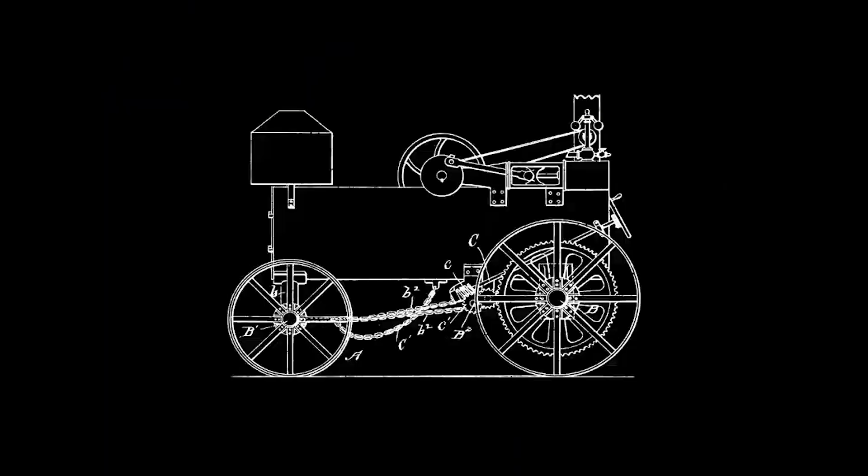You are everywhere, yet sometimes out of reach. You move us forward and bring us together. And together, we're on a journey towards the future of energy.

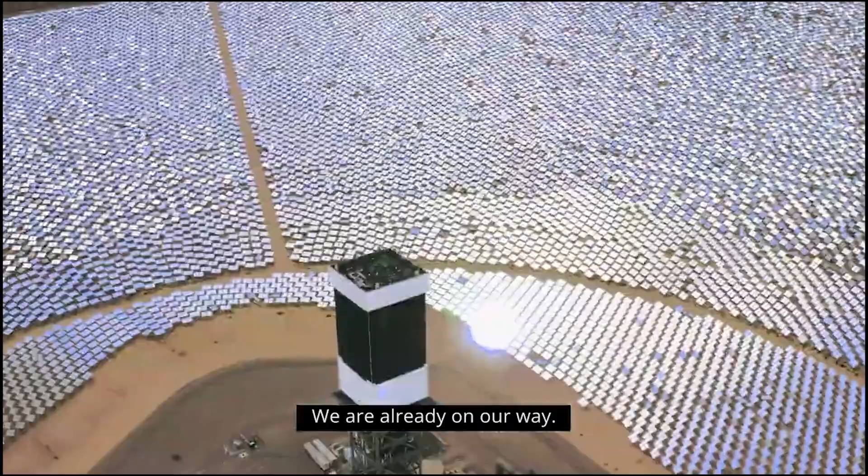So what will it look like? It's hard to say, but we know it will be sustainable and abundant. We're already on our way, with a common purpose, each of us playing our part.

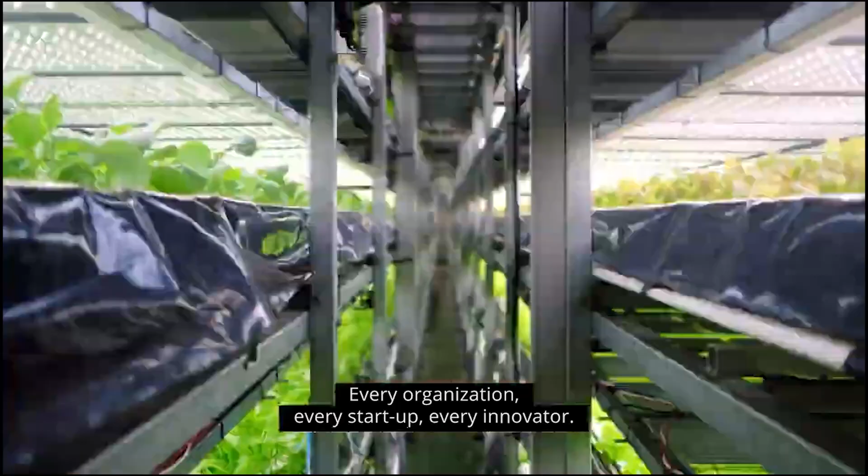At Deloitte, we're connecting every bright mind, every organization, every startup, every innovator, every citizen, CEO, and regulator. Making this future happen won't be easy, so we're developing practical solutions.

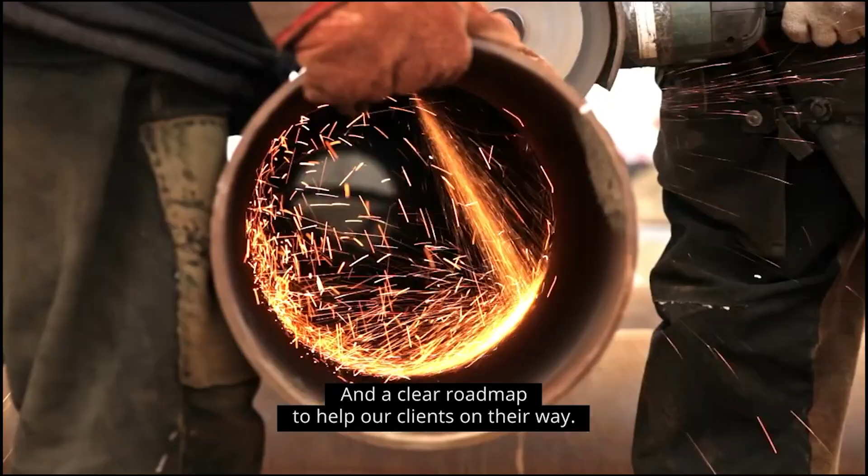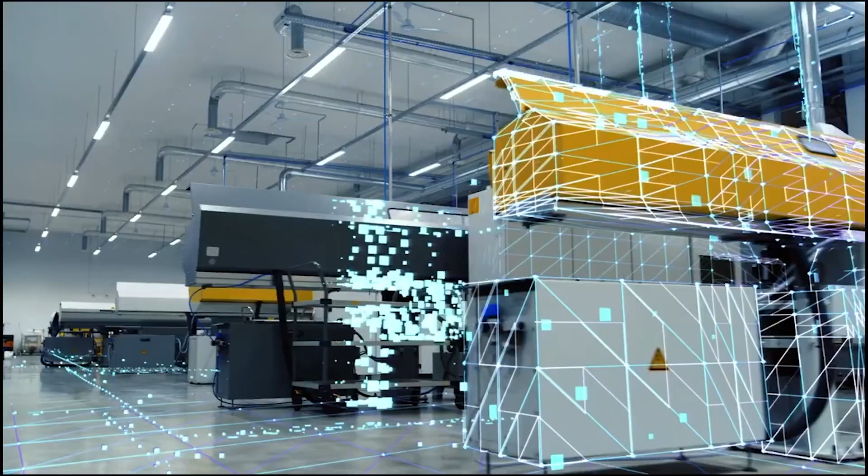And a clear roadmap to help our clients on their way. We'll keep making those connections, each step well planned, moving forward together, to make our new energy future a reality. Let's connect for a new energy future.

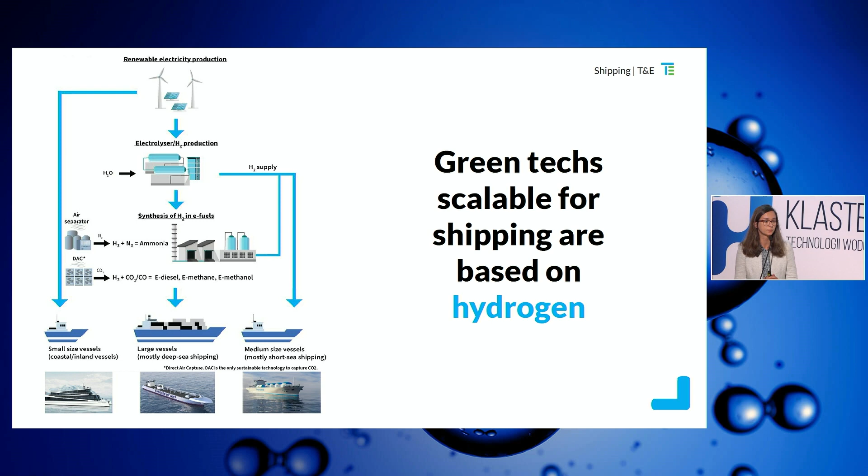So why is it an opportunity for ports to deliver green hydrogen for shipping? Well, a few months ago, we were having some difficulties with policymakers in Brussels, and especially the European Parliament, to try to convince them that there is this green hydrogen economy, but ships could also benefit from it, and it's actually a sector that is very hard to decarbonize.

But they were telling us it's extremely expensive, it would be very expensive for the end consumer. Well, we did the calculation, and actually, if you put a pair of sneakers in a box, in a container ship, it would cost just 8 cents more to power the ship with 100% of green hydrogen.

Here it is e-methanol. So this is because of the magics of shipping economics, which are quite unknown to most of us. But the facts are here.

And the point is how to upscale this green hydrogen for shipping, because currently there is no green hydrogen flowing to ports or powering ships. And the answer, we believe, is in legislation.

So, of course, we have some projects in ports. Many large ports in Europe have developed green hydrogen hub strategies, but we don't see a lot in these strategies of

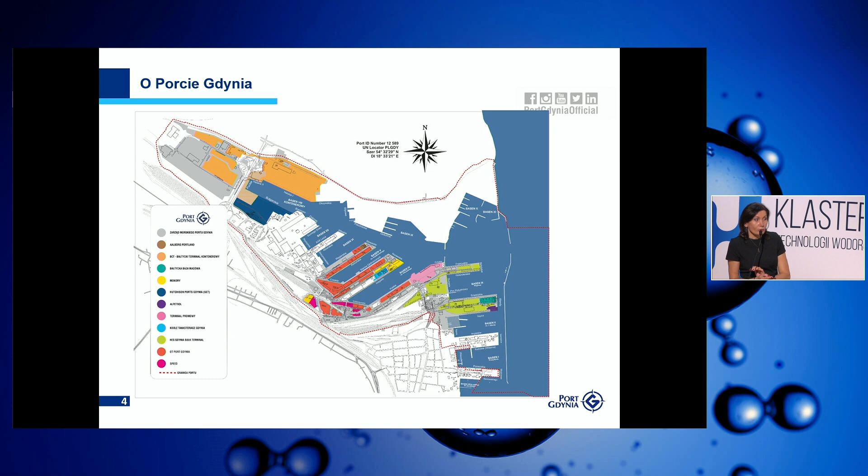We've got shipyards, we've got entities that provide port-related services, also those pertaining to maritime economy. These smaller entities also support the bigger ones so that they can really meet the demand for handling different kinds of cargoes.

Given that the port is a big entity bringing together many smaller ones, a few years ago we started working on fuel and power transformation. What I listed here are the most important initiatives concerning infrastructure and superstructure, two major directions: alternative fuels and renewable energy.

Port of Gdynia authorities is a topic that animates a range of activities catering for different needs of our customers. We bring together clients from port areas with those that are bidders in all sorts of procedures concerning our fuel and power transformation - think of producers of equipment or machines that can offer their products to recipients operating within our port terminals.

I will turn to the screen as I cannot see the small print anymore. Anyhow, we have both filling up stations and pipelines that are to be built in the port for the entire transformation to be attainable in terms of superstructure. We've got tanks, containers, a bunker, and vehicles enabling filling up.

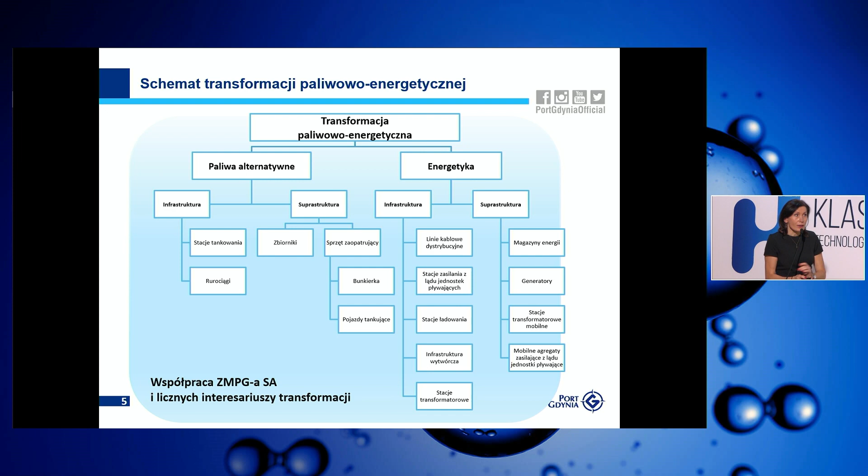The fuel and energy transformation has a few components to it. One of those is the implementation of hydrogen-related economy. A discussion has been going on how to ensure the fuels for those vehicles operating within the port and those ships calling at the port, and we are considering hydrogen.

Before that, we focused on LNG and we introduced all the procedures related to it in the Port of Gdynia. Now we believe that we shouldn't focus on a single kind of fuel in the port. In any global port, you have to think about offering different kinds of fuels, hydrogen among them, and also hydrogen derivatives.

Owing to our consultants having carried out all sorts of analysis, we can say that we are launching the initiative of creating a hydrogen hub in the port. So what do we imagine this hub to be like? How is hydrogen to be handled in port terminals? This is just an example.

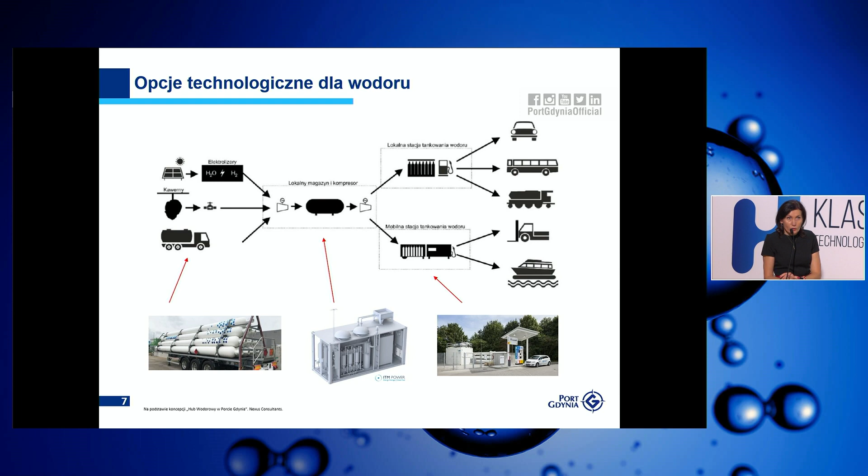There are no similar solutions in any other Polish port, so we need to develop it all. Our idea is to cooperate. In the area of alternative fuels, we do not have competitors here. The more we cooperate, collaborate, and resolve issues that we face, the more joint projects we have, the cheaper hydrogen is going to be. This is our idea for the development of hydrogen economy, and that is why we decided to go for the development of the hydrogen hub in the port of Gdynia.

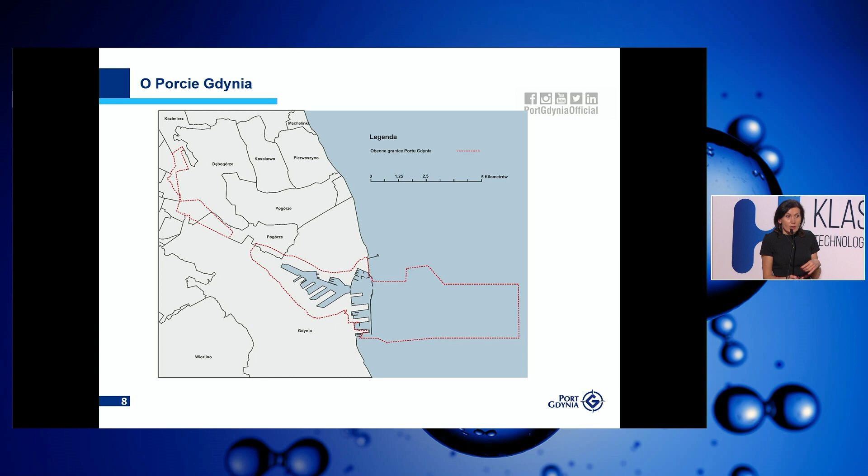There are two areas in the port of Gdynia where you can also see the administrative borders of the port. They're adjacent to each other. They are closest to the embankments in the port, and a more distant one, the logistics zone, that lies within three municipalities: Kosakowo, Rumia, and Gdynia.

As I said, the handling terminals, as the stakeholders of hydrogen economy, are very much interested in the introduction of hydrogen-related solutions. We've been working together for some 4 years now to make it happen. We have initiated both the Hydrogen Valley and are an active participant in the hydrogen technology cluster.

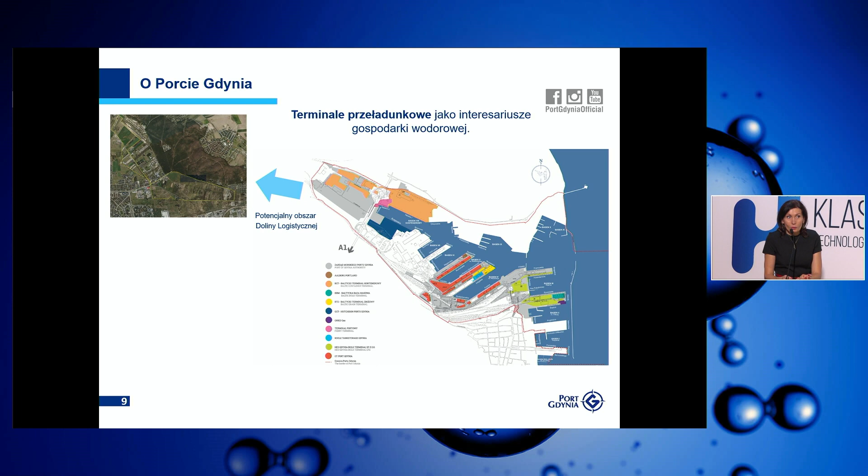At the Ministry of Climate, we have signed the hydrogen agreement. I'm also the board's plenipotentiary for hydrogen-related topics and an active member of a coordination board for the implementation of hydrogen at the Ministry of Climate. So I wanted to emphasize that we have been participating really actively in the activities concerning the implementation of hydrogen-related technologies, and there are partners that wish to go hand in hand with us, enabling the introduction of hydrogen and its derivatives to the port.

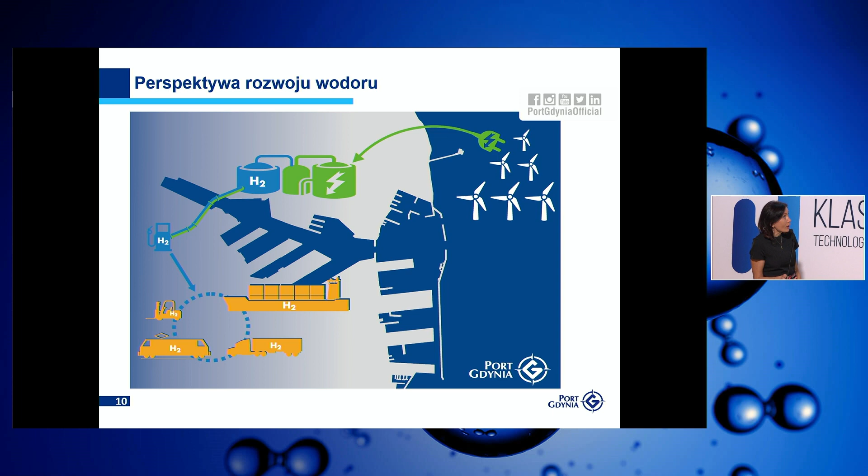This is the idea that we used to display. I mean, we have already shown it. We want to jump at all the opportunities that hydrogen economy offers. As mentioned a moment ago, LNG is the basis that we learn from.

Just a short story now, it will concern LNG. A few years ago, without having any regulations on how to bunker vessels, we had to come up with a way of doing it so that state administration would make it possible, would allow for that. We invited the representatives of the government to participate in exercises. There were some experts present, and we have bunkered ships already 17 times ever since, even though there is no regulation on the possibility of LNG bunkering in the ports. It's still not around. It has not been issued.

They're also developing photovoltaic farms, which allow us to obtain energy. So far, we don't have a project yet which would allow for creation of a photo electrolyzer at this photovoltaic farm. Of course, we'll have a problem with lack of energy now and very expensive energy, so it's not quite possible now, from a business point of view.

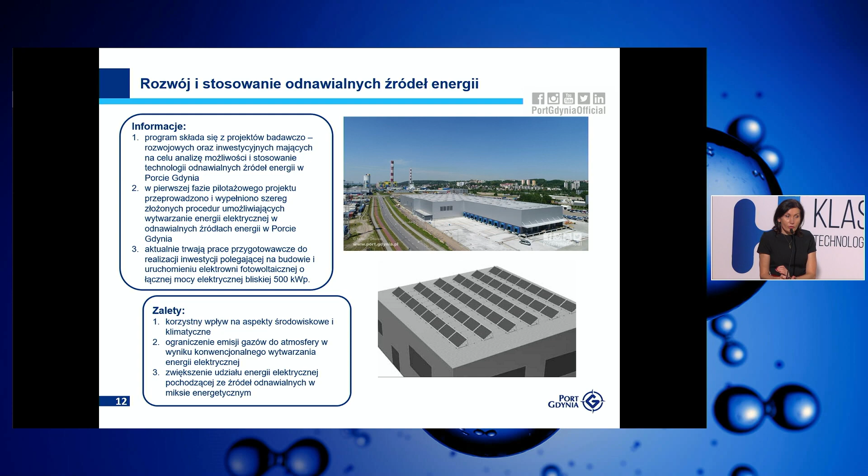However, in the future, I think we'll have more interesting projects which will allow us to produce cheap renewable energy and then transform it into hydrogen fuel, which will be used in the port of Gdynia. Thank you.

Thank you very much. I'd like to ask you about what concrete difficulties do you encounter when it comes to implementation of the hydrogen hub. I think we have similar problems as most ports. So the main problem is lack of hydrogen fuel and its derivatives.

We do hope, because there is a project that's being done by the city of Gdynia. In a year, we'll have a first hydrogen distributor in Kacze Buki, and from there, I think, hopefully, through mobile transport, we could bring this fuel to the port of Gdynia.

The second problem is lack of equipment which would make use of this fuel. Why is it a problem? Well, in fact, companies which produce equipment, machines, etc., they don't want to go into small pilot projects, and it's an issue because nobody wants to go into many kinds of different types of transportation or pieces of equipment used in terminals if it doesn't make business sense.

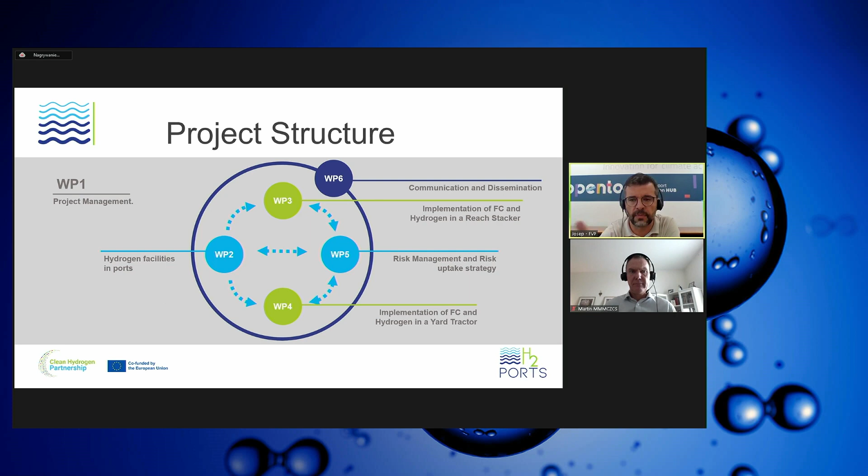Finally, we are the coordinators, and we have a lot of experience in coordinating experiences like this one. I'm gonna go through this one quite fast. This is the structure of the project, so 3 pilots and 3 work packages assisting the pilots.

So I think this is more interesting, is to share some more details about the specifics of the solutions. First, the hydrogen refueling. As said, it is going to be mobile. Mobile means that there is a unit that will deliver with a panel dispenser. With the dispenser it will deliver the fuel and visit daily the 2 terminals.

And a fixed part in which the hydrogen will be received, because there will be no hydrogen production in H2Ports. It will come from outside, and it will be stored in this tank. This is a picture of the real future hydrogen refueling station. It's not finished yet, but we are on the way. Here you can see the tank, in which it stores the hydrogen at maximum 40 bar, and it is compressed. Here you can see inside, you would see the compressor if we open the door.

That raises the pressure from the pressure in the buffer tank to the pressure stored in the mobile unit. Two levels of pressure, 300 bar and 450, and that's for saving reasons.

So you start the refueling in these vessels. You do not need to compress all the hydrogen at the same level, and just finish the refueling with the 450.

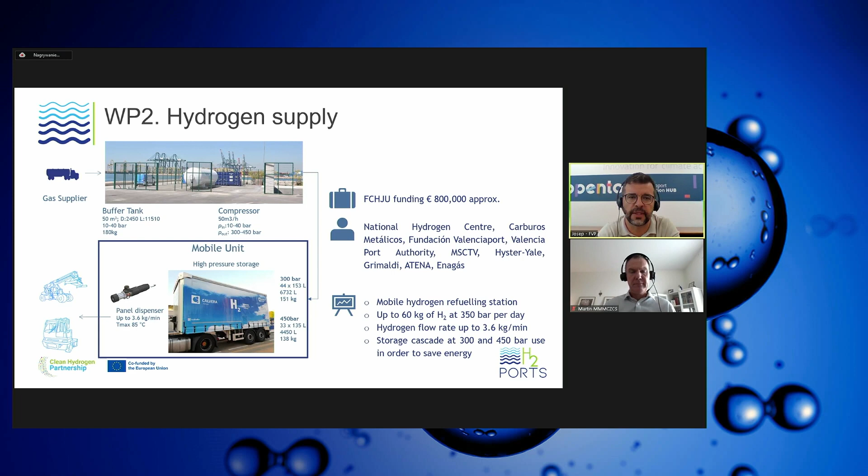The reach stacker is being designed and constructed by an original equipment manufacturer, Hyster-Yale. This is going to be a new building, and actually it's almost done. Here you have the 3Ds and real images of the fuel cell. The fuel cell will be 2 Nuvera fuel cells, 45 each, and it's almost constructed.

You can see some details that distinguish the hydrogen version here, including the hydrogen tanks. It is designed for about 32 kilograms of hydrogen, which will be enough for 2 shifts — in the case of the Port of Valencia, 12 hours of operation.

Also very important for the success of a project like this is the acceptance by port workers of units like this. For that, it is very important to start talking about this from the beginning, and to have dialogue between the manufacturer and the terminal to define which characteristics an equipment like this should have in order to be well accepted by port workers.

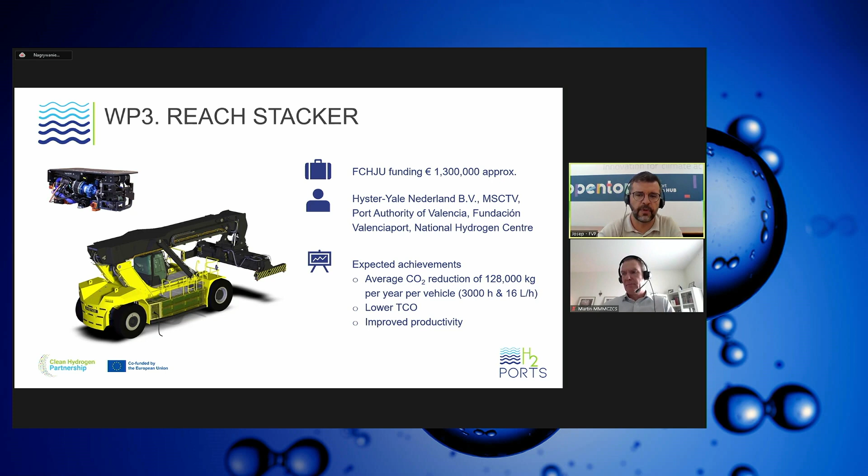Josep, sorry, I would like to conclude.

Okay, just 2 minutes. In the case of the terminal tractor, it is going to be a retrofit led by ATENA with a Ballard fuel cell. The Ballard also required adaptation to fit into the spaces. In this case, the retrofit is really challenging because there are a lot of things already determined, so there are a lot of things to do.

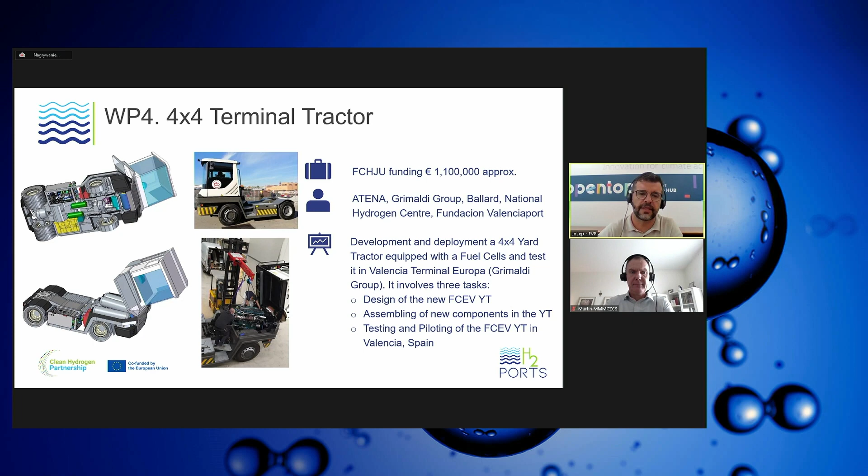But in the end, the collaboration between all partners has led to this success. We already had the truck with its first move, still not in full operation, but it is beginning to take shape as it will look like.

Then there is a cross-cutting work package covering issues like logistics, regulatory matters, and market uptake. Regarding the planning ahead, we are about to have the hydrogen refueling station finished this month, and we expect to have the equipment here either at the end of November or the beginning of December. There will be some preparation work, and we'll start the piloting period as soon as possible. So we expect the test to end at the end of 2024.

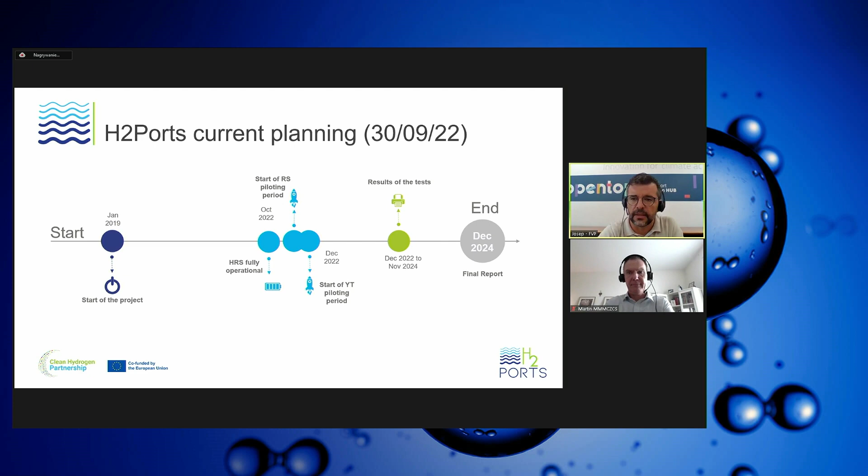So that has been just a quick introduction. If you want more information, you can check our webpage and also LinkedIn — we try to be very active on LinkedIn and Twitter, so we will be pleased to hear from you. You can also contact me if you have any doubts or want to comment on anything.